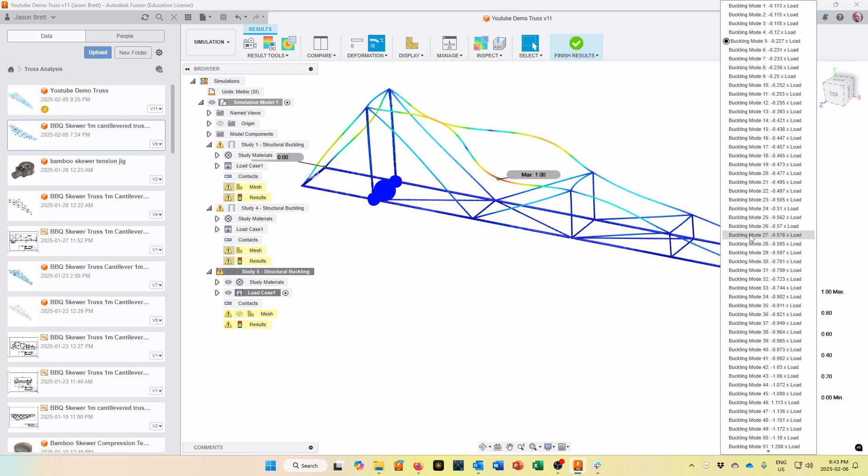In a previous video, we finished designing our truss and running a simulation on it, and we got to the point where our lowest positive buckling mode, here we were at buckling mode 46, is greater than 1, indicating that the truss, with the material properties we gave it, is likely to withstand the load.

So now we're going to come back to our design environment, and we're going to build the nodes that go around it, and we're going to lengthen the long members, join them together so that members longer than a single individual bamboo barbecue skewer can be glued together with a 3D printed piece.

Okay, so it's a really good idea right now just to hit save. You can see I've done that already, but every time you save it, it saves it as a new version. So in the event that you screw something up, you've got a saved version here, but if you follow the video, it's all going to work out fine.

Okay, so now we've got our truss. It's all put together right here. In my list in the top left-hand corner, I'm going to turn the truss I just spent all that time building off, and make sure that under sketches, I've got my sketch, that wireframe we originally created, turned back on. Remember how we built the original truss with pipes?

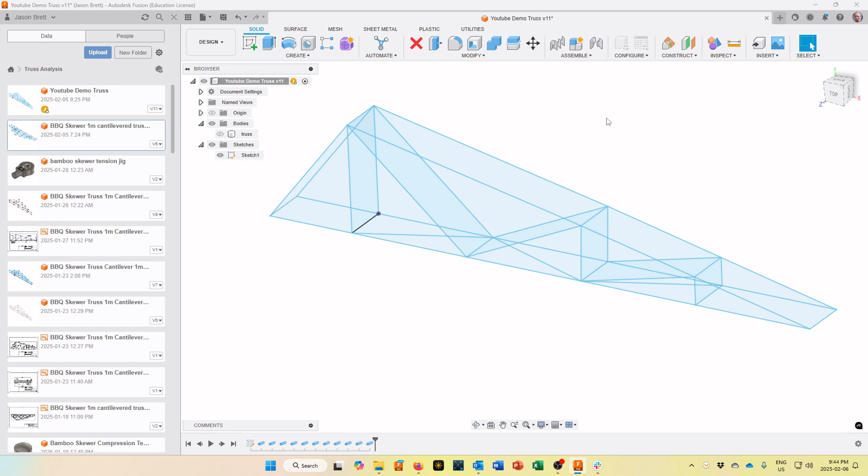We're going to do the exact same thing all over again, but this time with 10mm diameter pipes. These are going to form the outside of our 3D printed parts. Okay, so we've done this before. Create pipe, it's going to be a little bit boring here.

When we make the first one, like I'm going to pick this right here, and you can go ahead and pick all these ones just going around the outside at the bottom here. Doesn't really matter. Just don't get too excited and hit enter just yet.

Beautiful. And what we're going to do is we're going to turn our section size up to 10, so this is now 10mm diameter. This is going to represent the outside of your 3D printed part.

And instead of having join turned on, there's really nothing to join it to, so we're just going to create a new body right here. It's only for that first pipe that we're going to create a new body; after that, we're going to join everything together to it. We'll click OK, and you see it shows up right here as body 2.

I'm just going to double click on that so I can change the name, and I can say this is going to be the outside nodes, or whatever you want to call it. This is going to be the nodes, this is going to join everything together.

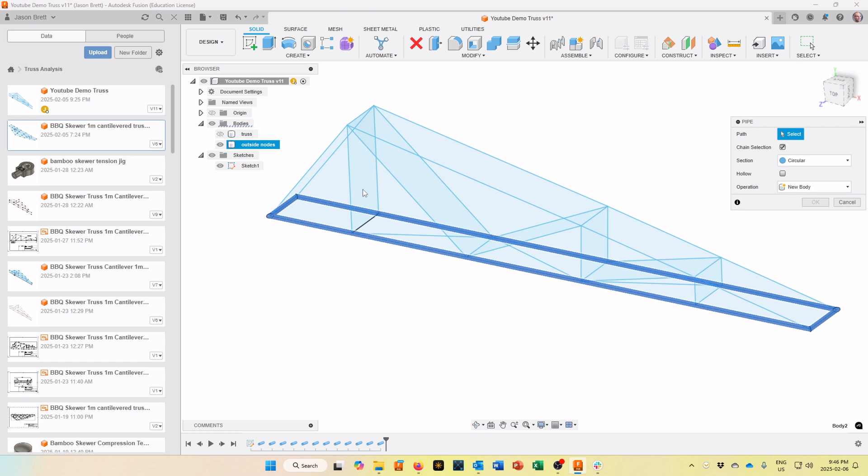Okay, and now we're going to come back to create, and this is going to be fun and exciting because we're going to create some pipes. I'm just going to come right up here and path, pick where you want it to go, right down there, and 10mm. We don't need to use parameters on this one because this is always going to be 10mm.

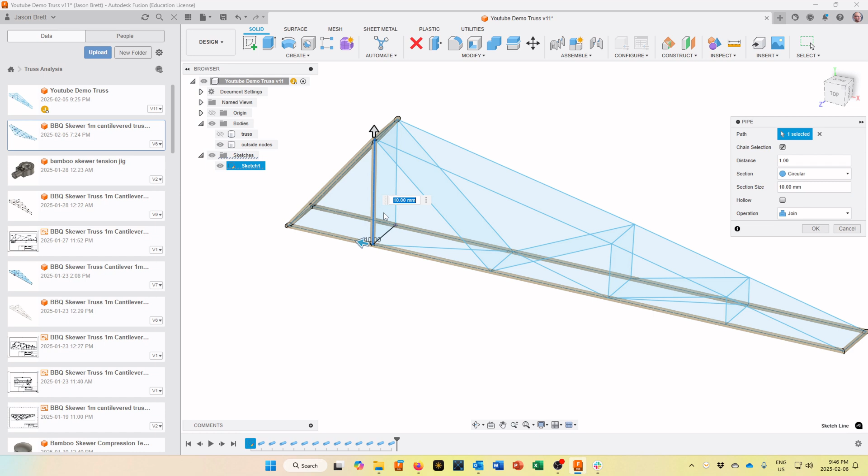Again, set this operation to join. It should remember that afterwards. Okay, we've put that in there. And now we're going to go ahead and create some more pipes until we get this whole thing filled in. Make sure you're on join and 10mm.

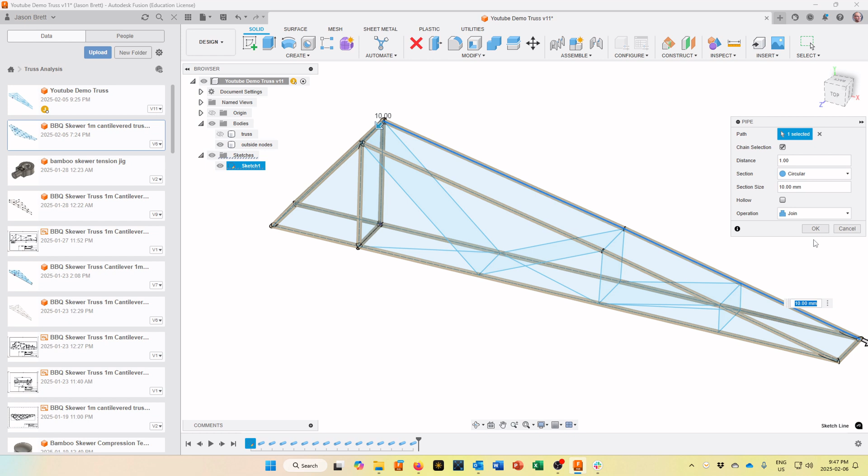Okay, you're probably thinking, surely there's a quicker way to do this than just going up to create pipe every time. If you right click, there's a repeat pipe button right in there, and right clicking will bring something up that lets you smooth this process out a little bit. That's all I'm doing right there to get these pipes in.

There's those ones along the bottom. Repeat pipe. And make sure you pivot around so you can see what you're doing a little bit.

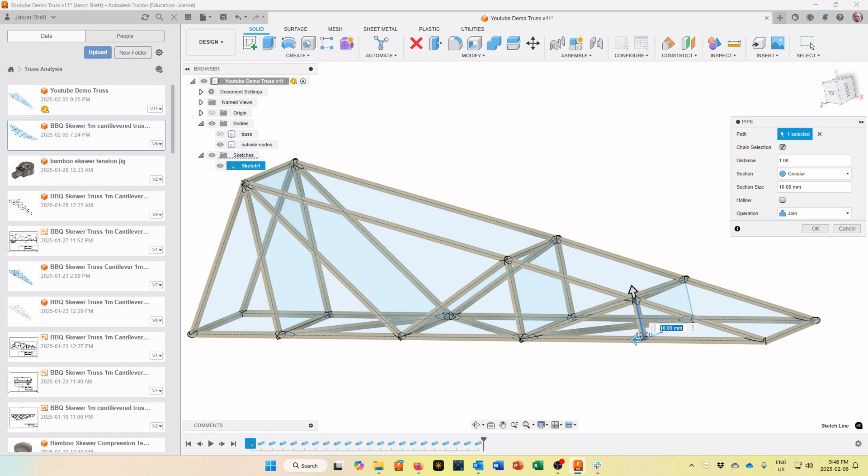Okay, double check your structure to make sure that you've got the entire wireframe covered up with 10 millimeter diameter pipe. And if you do, excellent. That's going to form the outside of your nodes and your joints for making the pieces longer, like this piece right up here, that's longer than 30 centimeters.

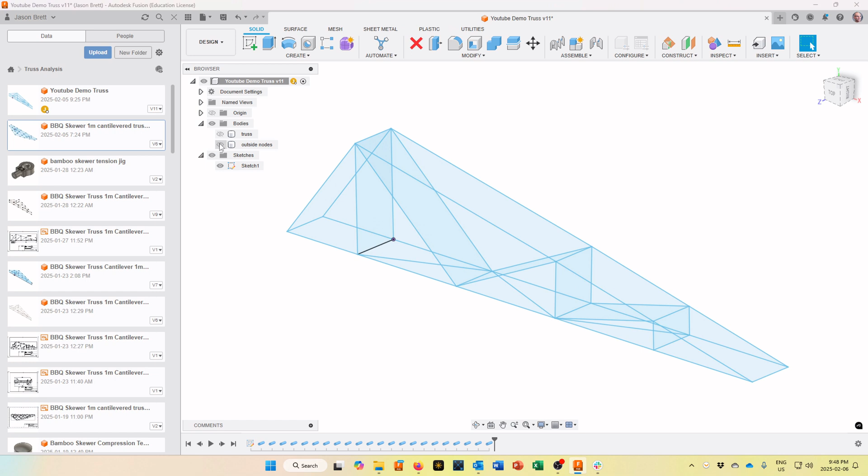We need to glue it together. Okay, so you've got that all done. We've got the outside nodes, and what you can do is you can turn that off to make sure you got everything covered up, then turn it back on. That's great. We can turn the sketch off, we're not going to need that anymore.

And we're going to turn the inside truss back on. Now that inside truss is actually sitting inside the outside nodes. Okay, and we're going to do a subtract, but before we do, you remember that we used parameters for that inside truss?

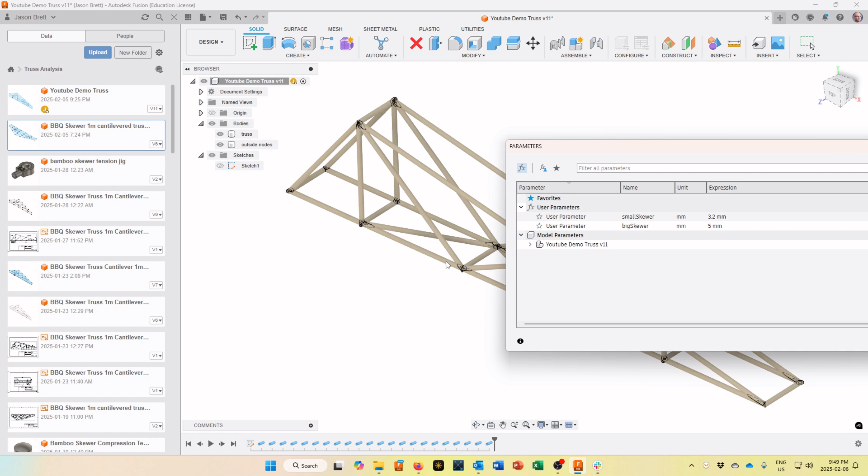Come in here to modify and go down to your change parameters. Earlier we gave it a dimension for the small skewer. We said it was going to be 3.2.

This is where you put in the value you want for clearance for your nodes, since you're the one who's going to have to assemble this. If you've got 3.2 millimeter diameter skewers, you don't want a 3.2 millimeter diameter hole to put them into, because once you account for a little lack of tolerance in the 3D printer and a bit of out-of-round in your skewer, you're not going to be happy fitting a 3.2 millimeter skewer into a 3.2 millimeter hole.

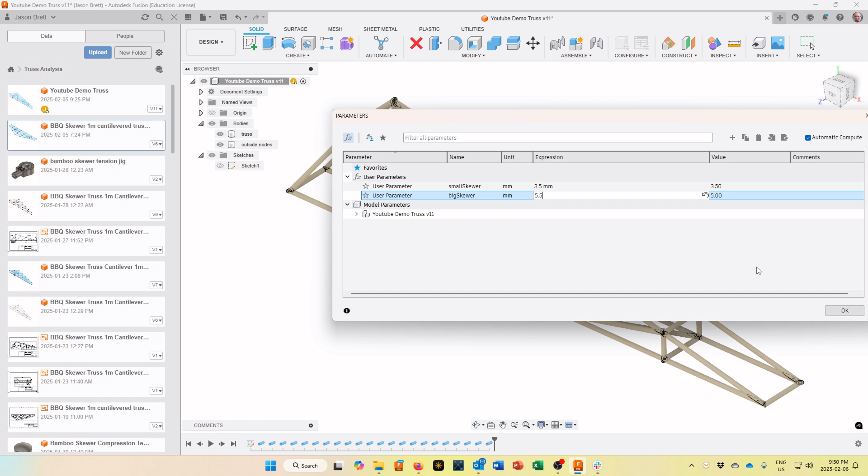What size you choose exactly is up to you. I'm going to go a couple tenths of a millimeter larger. In my testing, 3.5 worked pretty nice for this, and something like 5.5 worked right for the other one. But you might have your own favorite values, and your skewers might be slightly different from mine, so these values are kind of up to you. Just change those sizes, and that magically changes the size of your inside skewers.

Now what we're going to do is a combine operation. I'm going to click on combine, and for my target body I'll come over and click on outside nodes, and my tool bodies is going to be the truss. But it's not selecting.

Errors are really fun when you're recording a video. I think I've got that sorted out now. If you run into that error and can't select something, you should be able to come in here and select it and have it all light up. If that doesn't work for you, just save your file and restart Fusion 360, and when you open it back up, hopefully the problem's gone away. It's a bug in Fusion 360, and thankfully I caught it on video, so I'm going to submit that as a bug report to the people at Fusion 360. Maybe they can help me figure out what happened there. But shutting down, restarting, and opening back up might get rid of that problem for you. Anyway, we're back to where we are.

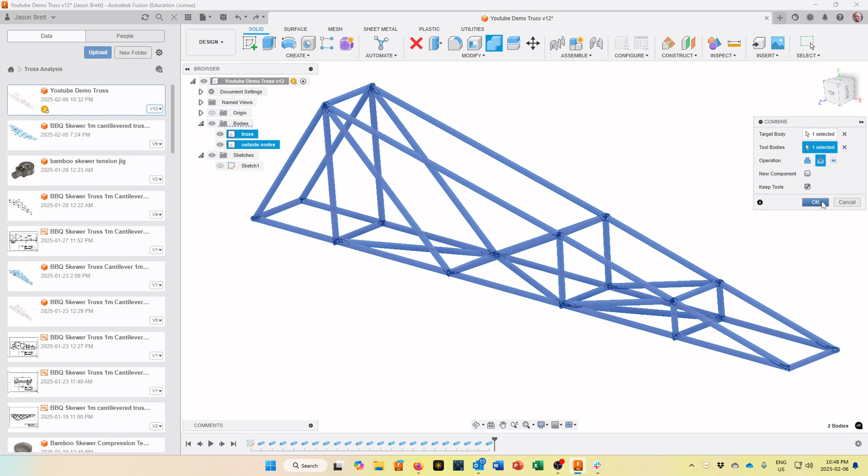Maybe you didn't have this problem at all. What we're going to do is a combine operation. When you pick combine, choose cut as your operation. Turn off the new component, since we don't want a new component here, but turn on keep tools, because our tool body is going to be the inside truss and our target body is going to be the outside truss. For select your target body, come along and click on the outside nodes button. Then for my tool body, I'm going to select truss right here. That's going to remove the inside truss from the outside truss, leaving us with hollow space inside.

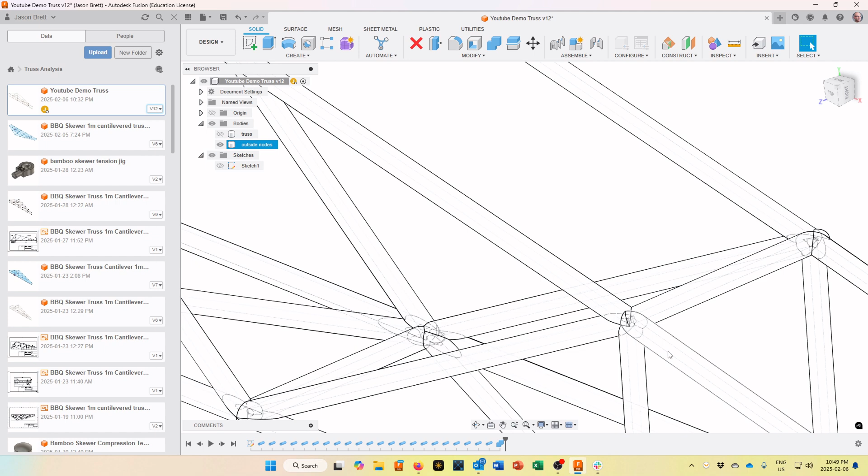Now you can turn off that inside truss, and if you look carefully in here, you can see there's hollow space inside there. There are also some cool view options here, like if you come down to display settings - right now I've been watching shaded with hidden edges, but you could go to wireframe with hidden edges, and now you can zoom in and see all the hidden lines in light gray right there. That's the space left over for our inside trusses, where our skewers are going to go. That was display settings, and I'm just going to set my visual style back to shaded with hidden edges. They just don't show up as much, but they are in there.

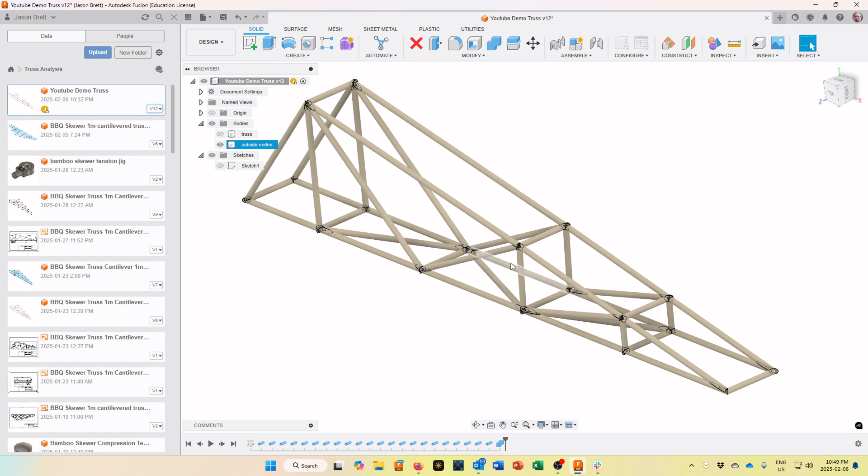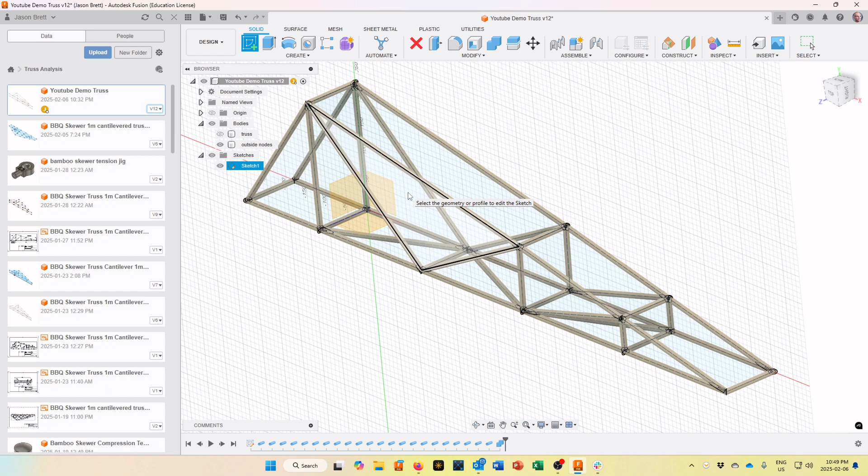Now what I'm going to do is make sure I've got sketch 1 turned back on, because I need to use its geometry for a bit. I'm now going to chop away at the outside pieces here to only get the nodes I want for gluing things together. With that sketch turned on, I'm going to create a sketch, and I can click right here, which creates a sketch plane right on the mid plane of this set of nodes.

I'm going to come in here and create some circles. I went up and grabbed the circle button, and right at the center of a node, I'm going to make this 50 millimeters in diameter. That's how big.

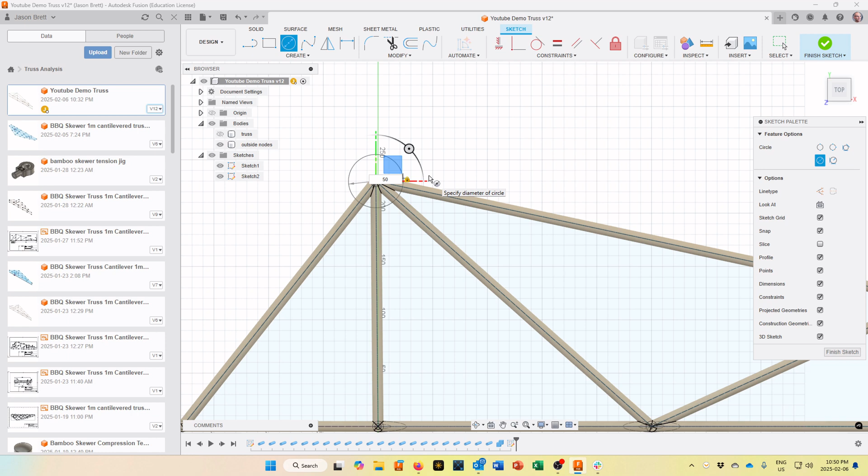Let's do it 60 millimeters in diameter. I want to make sure that you've got lots of room to glue everything together. That should stiffen everything up really nicely. Okay, so there we go, 60 millimeters in diameter there.

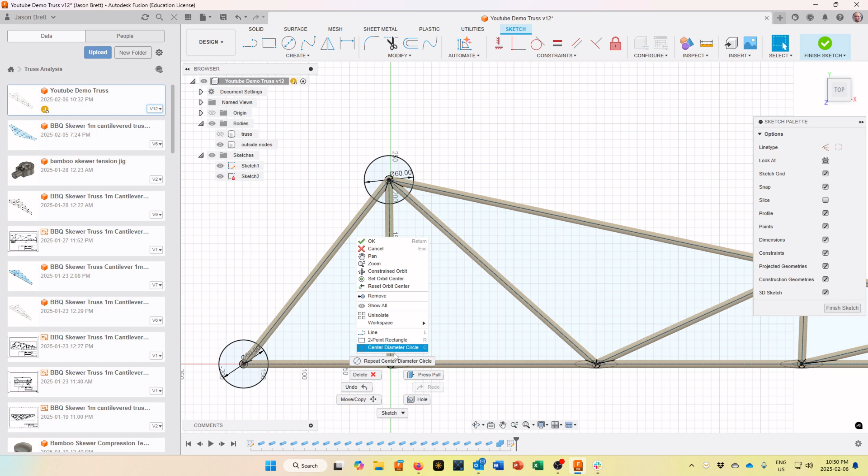Repeat center diameter circle - that was just a right click to get that. Down at this end, we're going to do 60 right here. Repeat center diameter circle, and guess what we're going to do? We're going to do 60 right there. And I'm just going to pause my recording because I'm going to go through here, and at every node, I'm going to put a 60 millimeter diameter circle.

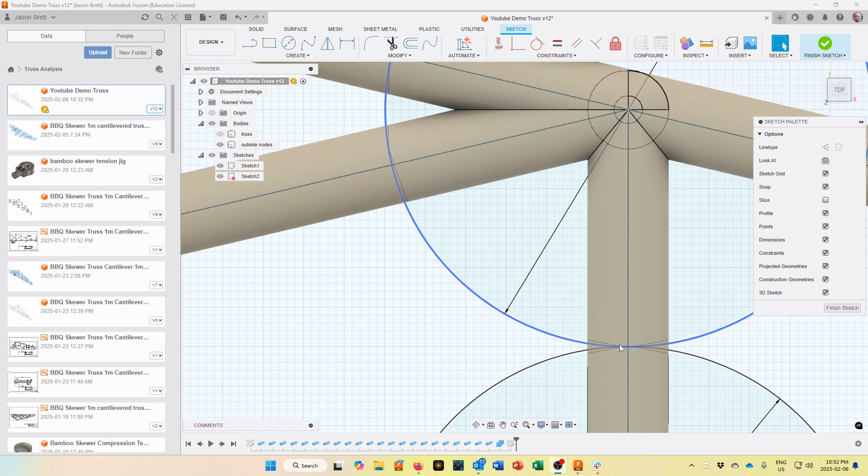Okay, so I went through and I added 60 millimeter diameter circles to all these nodes, and I noticed that this one got really, really close. That's going to be kind of ridiculous when you put your skewer in there. If you have a node that's less than that, you're just going to have to reduce the diameter of the circle.

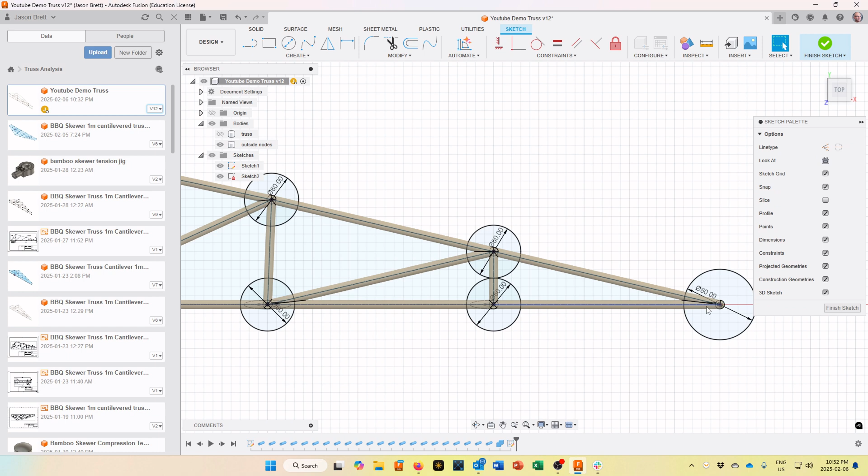Okay, there is one place where you can make one larger than 60, and that's going to be right out here. This one, because the lines are so narrow, sometimes 60 isn't going to be big enough to actually hold those two parts independently, so you can take that one up to 80. And that very end one, if it's really pointy, you can take it up to 100 - basically just big enough so that you can see some variation right in there and those start to split apart. You can't go any further than that.

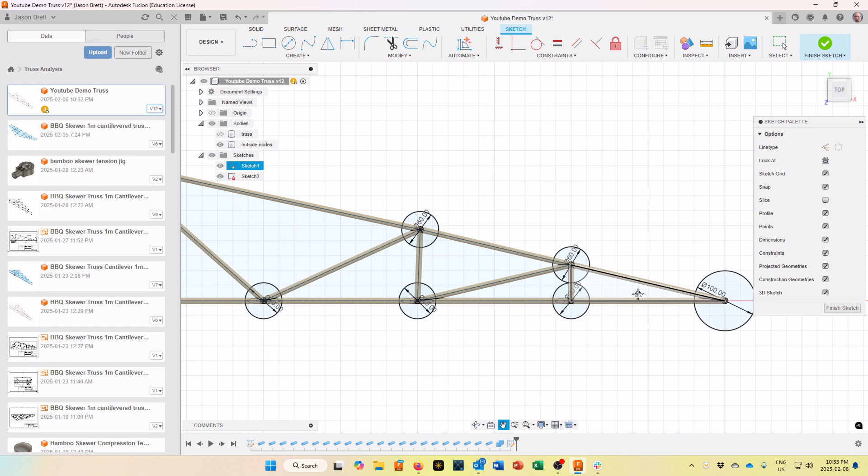Otherwise you won't even really have a Bamboo BBQ Skewer truss, and not only that, you won't be able to fit everything onto the 3D printer. Now the other place I'm going to put a circle is right here because this piece is longer than 300 millimeters, so I'm going to have to bond a truss together right in there. If you slide along that line, you'll see that pops up, and I'll put a 60 right there so that I can glue those two pieces together later on.

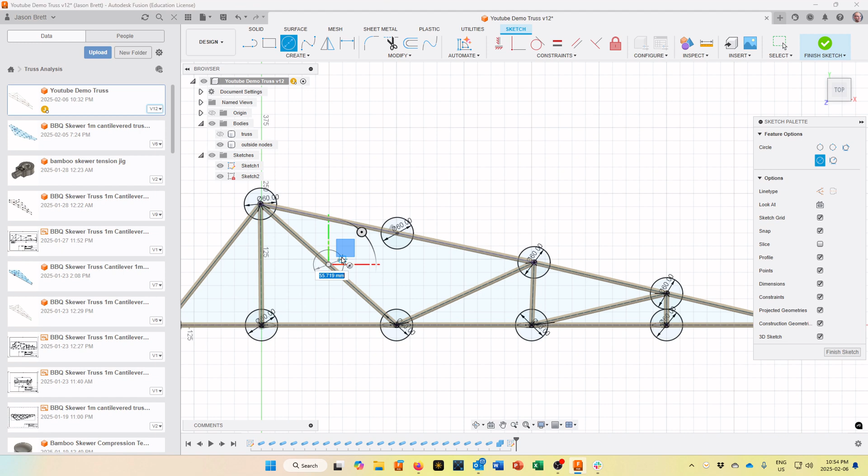And then if you're not sure how long something is, you can measure - I'm going to measure from this point right to that point right there. I just picked up the measure tool, and again, that's longer than my longest skewer, so just hit escape to get out of the measure tool. I'm going to have to put another member right here, slide along there - there's the middle, 60. So those two are going to get glued together.

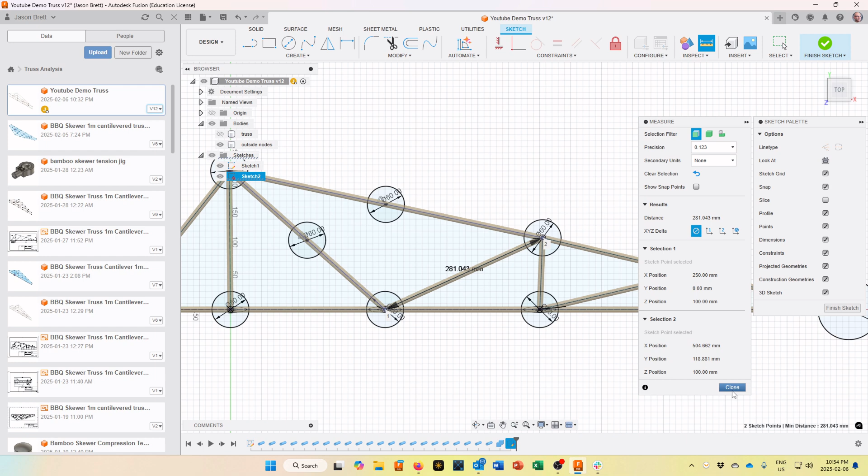And I better inspect a couple other long ones. So again, I come up here to measure, and then I click on the middle right here and the middle right there - 281, I can get that out of one barbecue skewer. Okay, and let me measure this one back here. It might be 290 - that's touch and go, but you can get that out of one barbecue skewer.

Given that that's a pretty critical piece, you might not want to. I think about 280 - you can get 288, but if you're over 288, you can put a joint in the middle. I'm just going to close this. It's up to you because it's going to be heavier if you put joins in the middle, but maybe that makes it a bit stronger. This one is kind of critical to holding the whole truss together, and you want to have good bonds at the end. So anything that's longer than about 280, go ahead and put a joint in the middle of it right there, and you should be fine.

Okay, so take a look at your truss from the side and say, do I have all my nodes covered with 60 millimeter diameter circles? Do I have my super long members with a splice in the middle so that I can join them together? And do I have my hundreds down here put together like so. And if you do, that is great because we are now going to turn those into little cylinders.

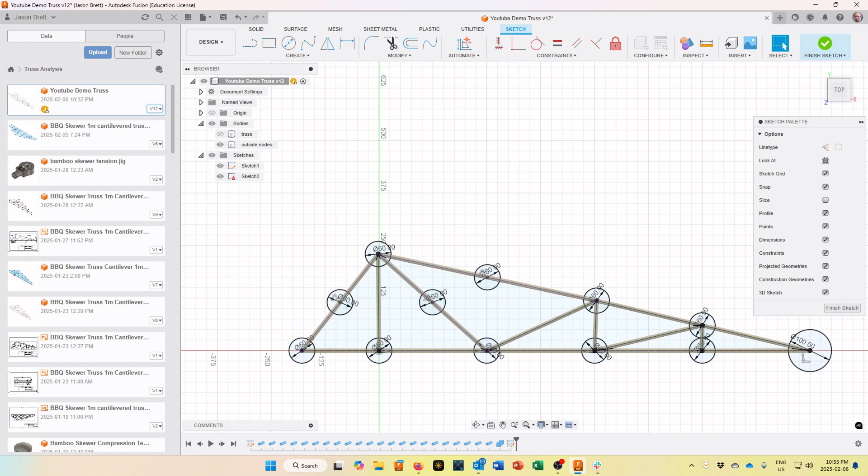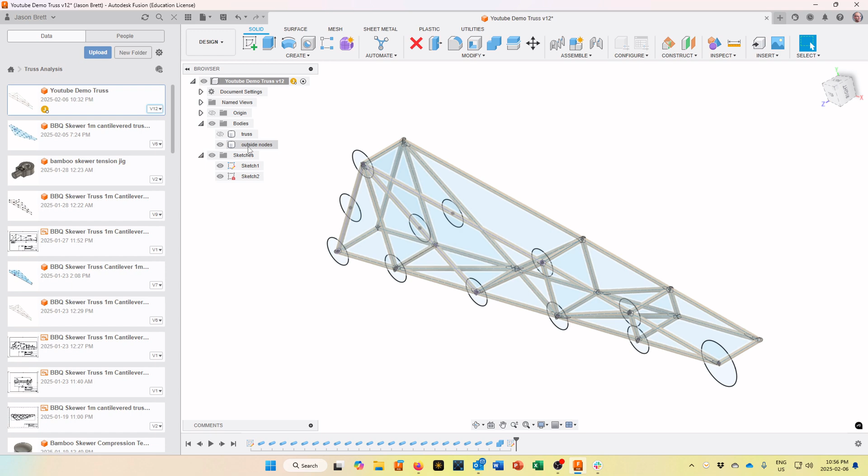So click Finish Sketch right here, and then use your view cube or however you like rotating to bring it around right here. Okay, and now you've got those circles on all those places that we're going to join. Make sure right now, because of the operation we're going to do in a minute, that truss is turned off, outside nodes is turned on. You can see sketch one still on there - you can turn sketch one off for a minute. Okay, now you just got sketch two showing on there.

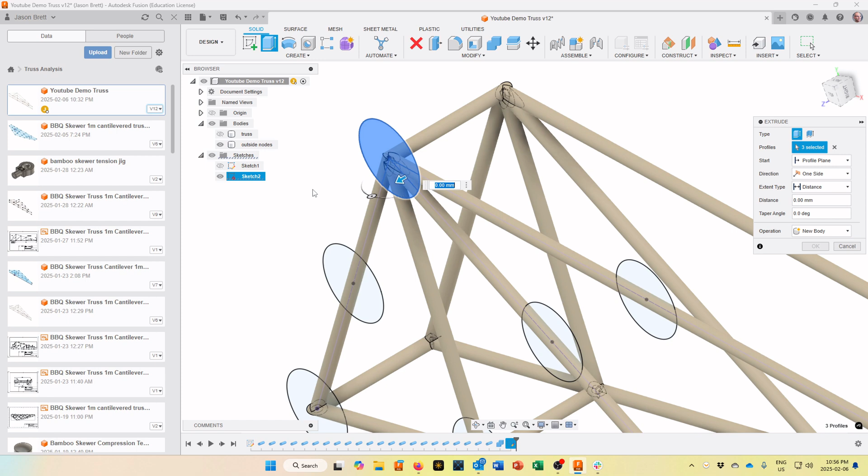And what you're going to do is you're going to do an extrude. That extrude's going to come through right here - make sure you select everything. Some of those extrudes are going to be split apart by other lines that were on that sketch plane, so you have to come through here, and sometimes you'll get the whole thing, sometimes they'll be split, but just select the whole thing. So you see all these big blue dots coming out like so.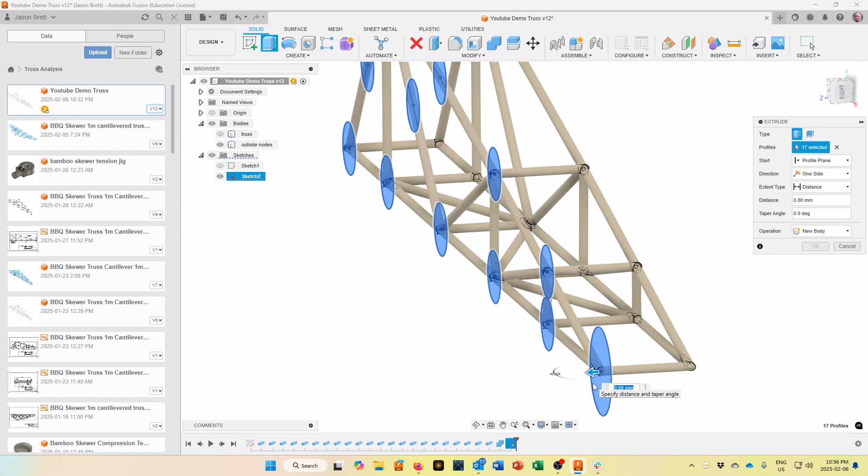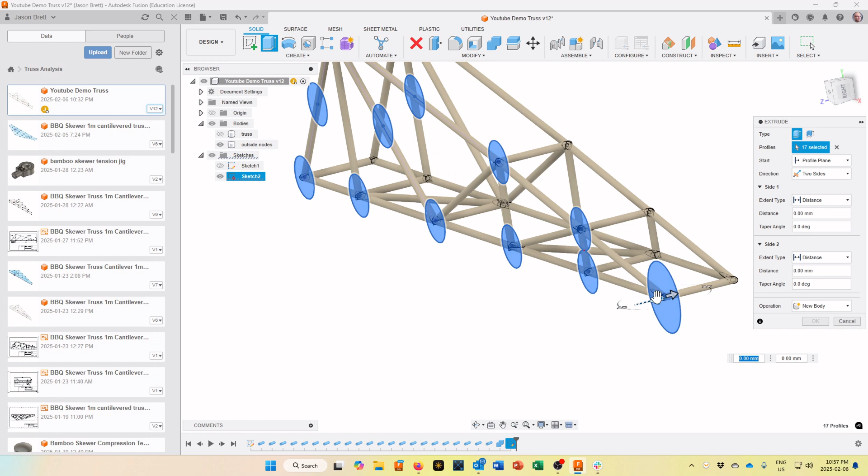There we go, brilliant. Now we've got a lot of options over here on extrude. We've got all our profiles selected, and what we're going to do is a two-sided extrude so that we can give it dimensions on two sides. The first dimension is going to come out this way, and you can see when I look at it, we're right down the middle there. So we're going to come out 4 millimeters in that direction.

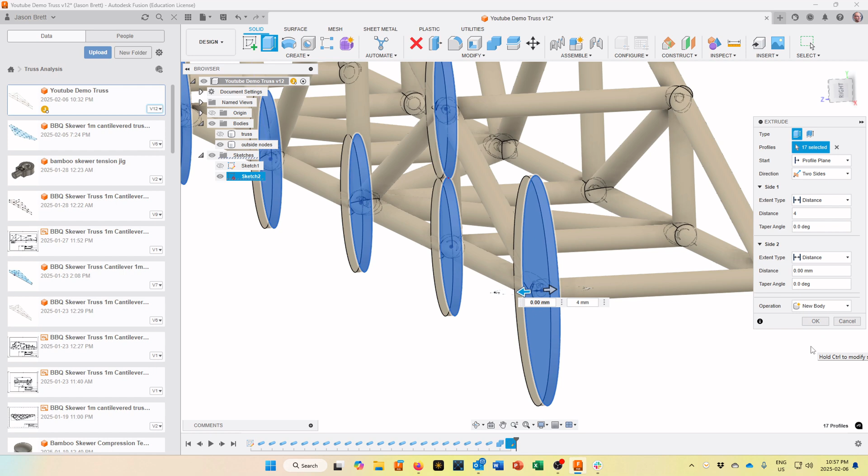And what we're going to do is create a new body right here. We don't want to cut, we want to create a new body. We came out 4 millimeters that way, and on the other side we're going to come out 25 millimeters here, so that we're able to take a chunk of this along here.

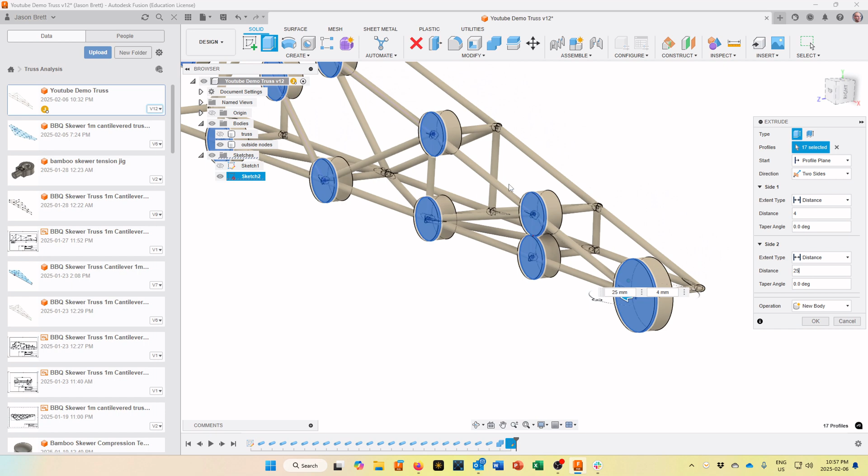Later on, we're going to do one of those combine operations. Before, we did a subtract to remove the inside. Here we're going to do an intersect to keep what remains of our outside truss. This is where those skewers are going to come from.

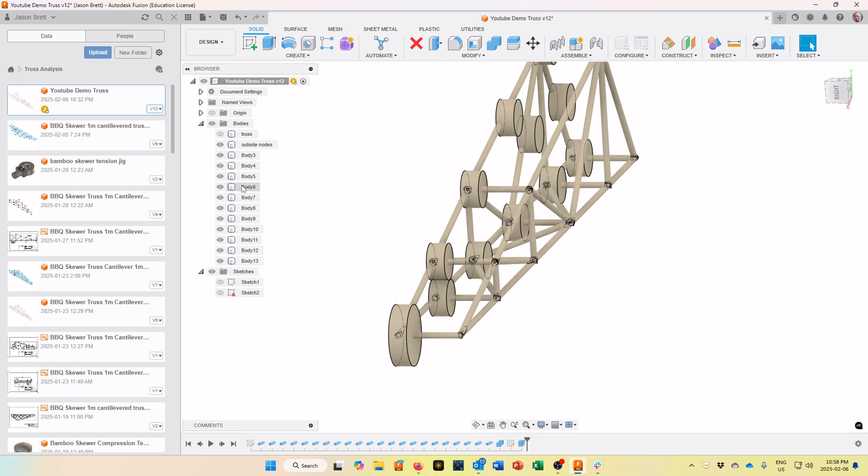Okay, so we've got that all on there. It's coming in as new bodies, and we'll click OK. Now this is going to come through as a whole bunch of new bodies, but just click OK, and there you go. There's all your outside bodies right there, and that covers this side right here.

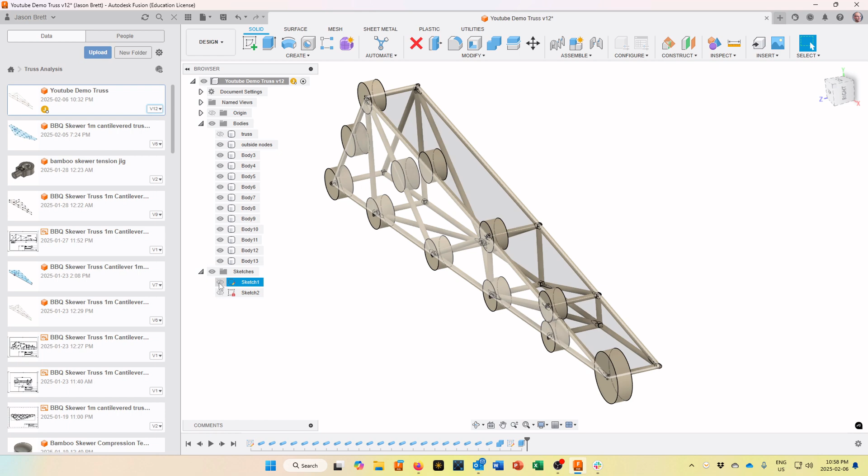Later on, we're going to do an intersect with them, but before we do, we want to do a batch of bodies like this on this side right here. So the easiest way to do this is to come in here under construct. Oh, let's turn sketch one back on. Okay, so there's our sketch right there.

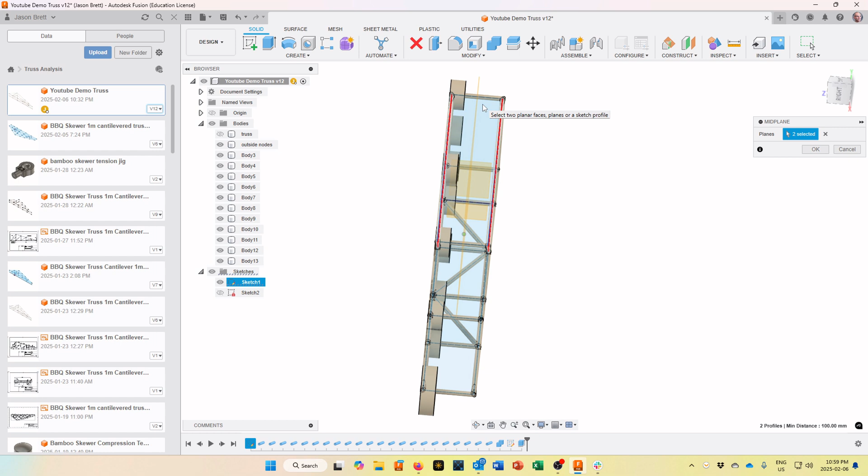Construct, and we're going to create a mid plane right in here. I'm going to click one plane on this side, so you see that triangle lights up that side. Then I click one on that side, and poof, you can see now I've got a middle plane that's appeared right around here, right down the center. I'm going to say OK.

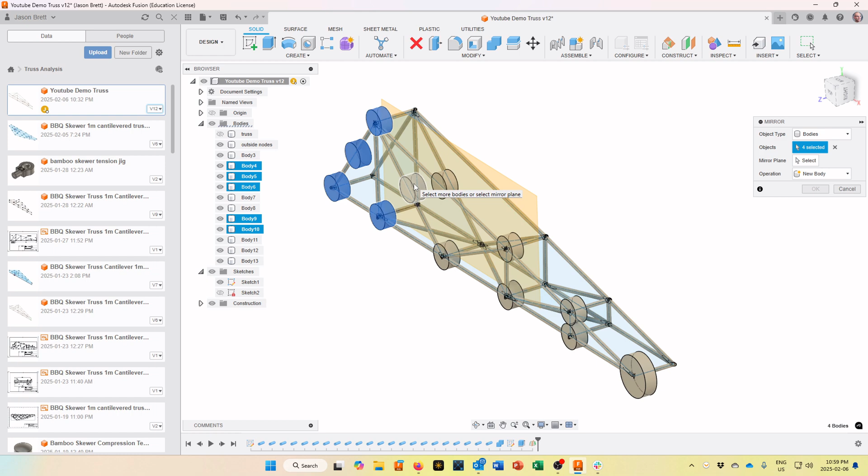Now what I'm going to do is create a mirror of all these bodies. So I'm just going to come in here and click all these bodies. Careful not to accidentally pick up your truss. You can always click it again to undo it if you do, but you just want to pick these bodies up right here.

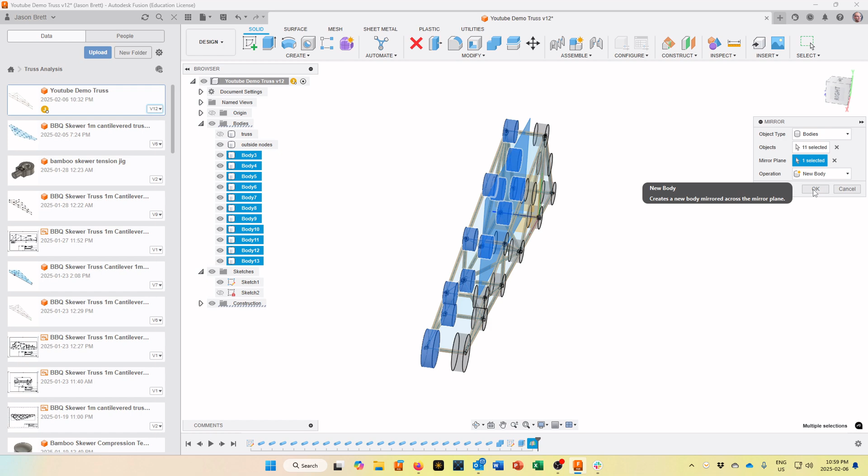And yeah, we're just going to leave that as new body. And now they're all joined together right in there. You can see what we've done right here is because we've only brought them out 4 millimeters, but this diameter is 10 millimeters, we're going to have a little flat side remaining. You'll see what I mean by that when we do the next step.

So you should have something like this, with all these cylinders representing where our body is going to be. We want to make sure that truss is turned off right now because we don't want to cut away at our truss. Okay, that combine command, here we go.

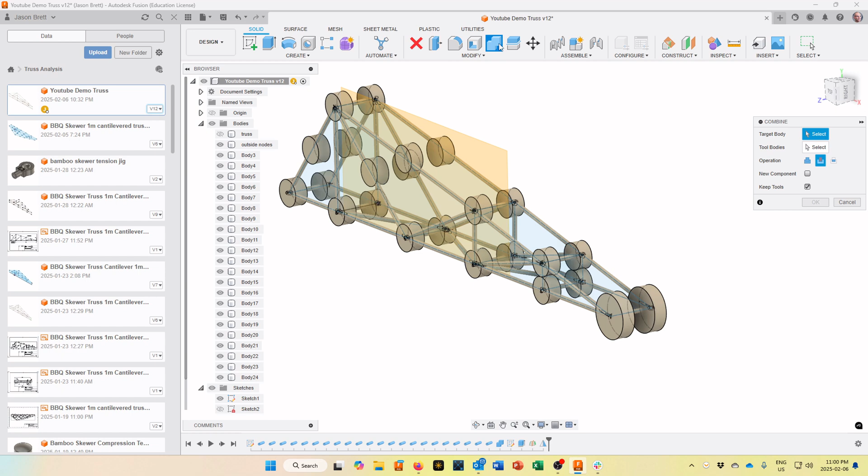We're going to do combine. Our target body is going to be the outside nodes - that's the part that we're going to 3D print to join everything together. Our operation is going to be intersect. We are not going to keep our tools.

And now we're going to select our tool bodies, and our tool bodies are all of these right here. And you can see as I go through and select the tool bodies, what's getting left behind are going to be those nodes that we want to 3D print.

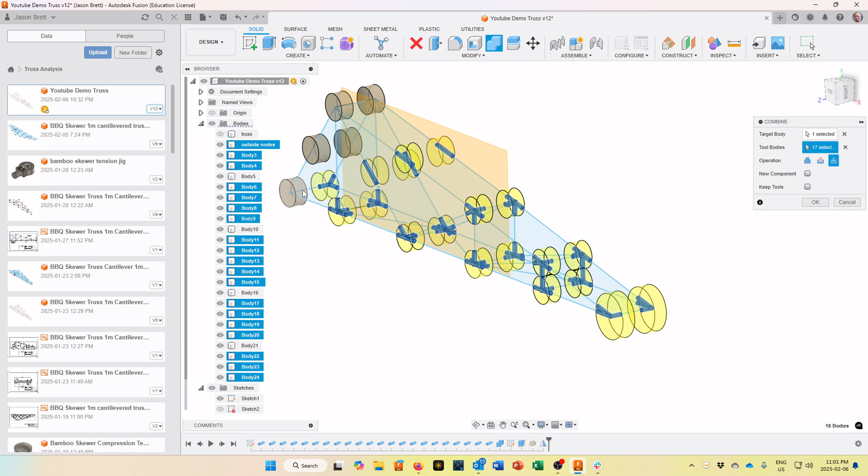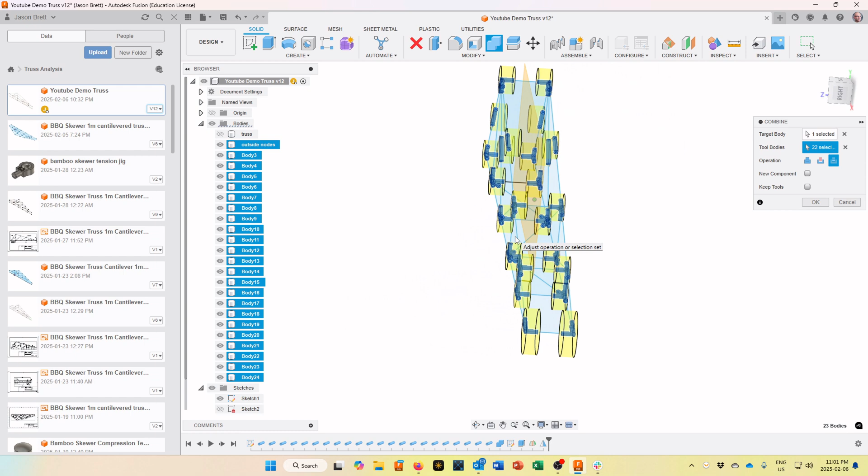It's kind of pretty, isn't it? Okay, take a look. And look at those complex shapes that you've built, customized for each side, so the nodes can follow along right there. And you'll also notice that because we only came out 4 mm this way, you've got little flat pieces on each side right there.

Brilliant, love it. Click OK. A bit of processing going on here. Okay, now look at that - there are all of our pieces left out there. They're now called outside nodes 0 through 21.

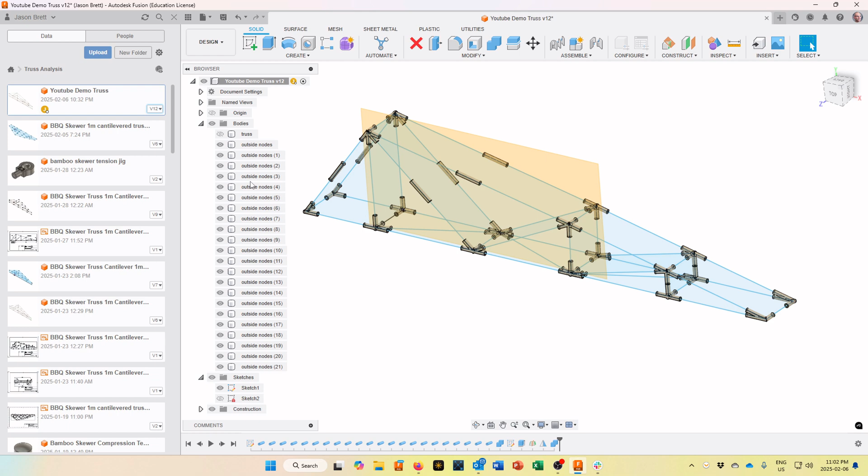And if you turn on your inside truss now, there you've got a picture of what the whole thing's going to look like when you put it all together. Okay, this is a good time to hit save because things can go wrong. If you're making it here, you're basically done.